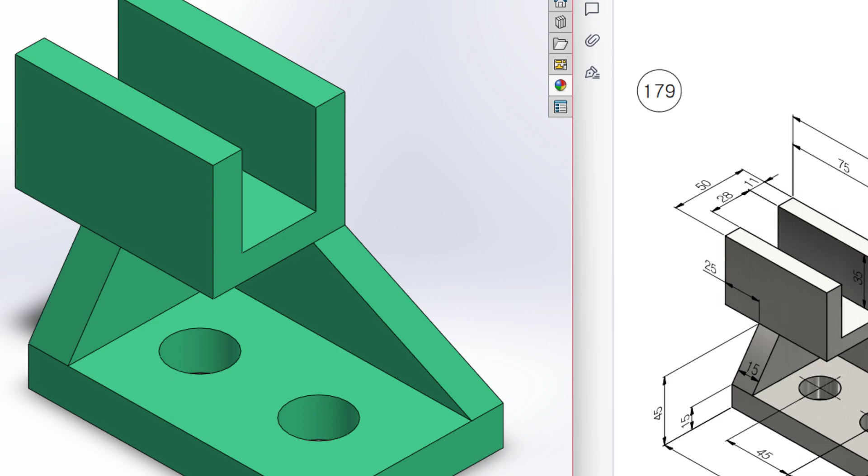Today we are going to solve this 3D problem. In this 3D problem, this is the isometric view and all the dimensions are given in the isometric view. We are going to start drawing from the top plane. In the top plane, we can see we have a rectangle, and this rectangle has a dimension of 110 by 70 unit. Then we can see it has an extrude boss of 15 unit.

In our rectangle, we have two extrude cut circles, one is here and another is here, and these two extrude cut circles have a diameter of 22, and this distance is 30 unit from here, and this distance is 30 unit here, and they are 45 unit apart. Okay, let's first draw that portion.

So let's go back to our sketch. So I'm selecting the top plane here. Now select sketch. Okay, now select the corner rectangle, draw a rectangle of 70 by 110 unit. Okay, so this rectangle has been done. Now isometric it for a better view.

Now go to features. Now extrude boss. Now extrude boss it to 15 unit. Okay, now press OK. Now this portion has been done. Now we'll draw the extrude circle. If you want, you can draw the extrude circle in the previous sketch, but I am drawing it separately. Now select this portion. Now sketch. Now normal to it. After that, select the circle from here and draw a circle

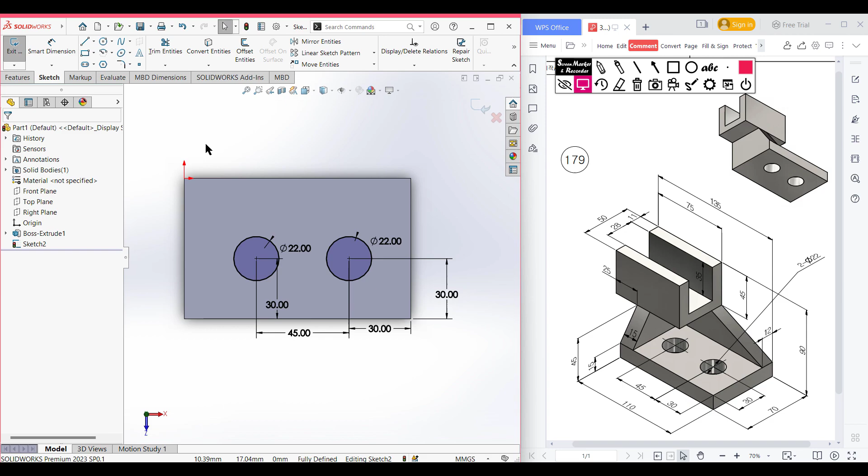Now go to features. Now extrude cut. Now extrude cut it to through all. Okay, now press OK. So this extrude cut circle has been done. Now let's go back to our sketch.

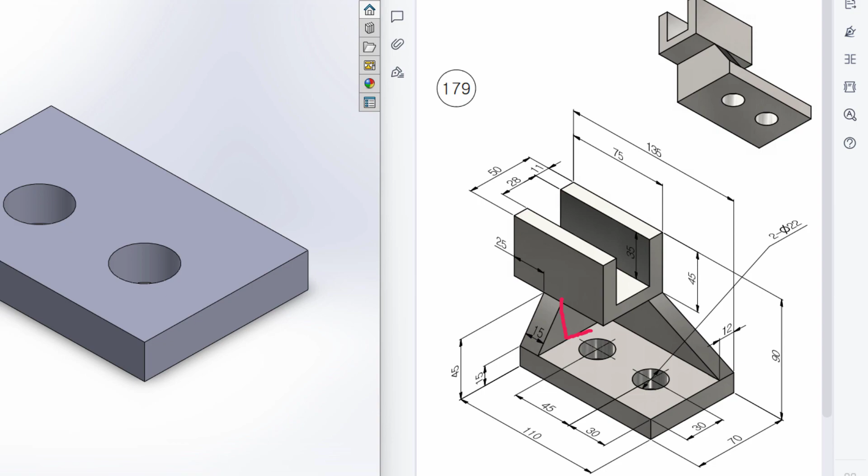In our sketch, we can see we have a trapezoidal shape like here, and for drawing this trapezoidal shape, first of all, if we look back to our sketch, we can see this portion is quite a rectangular shape. Okay, and for drawing this rectangular shape, we can see it has a distance of 50 unit. And the vertical distance is 45 minus 15 unit, and from that I will draw an inclined line like here, and then I will close the shape, then I will extrude boss it to 15 unit.

Okay, so in the same way, we can see we have another rectangular shape in here. And this rectangular shape has a distance of, as this extra distance is 25 unit, so this portion distance will be 75 minus 25 units, so it will be 50 unit. And then we can see this vertical distance will be the same as the previous, 45 minus 15 unit. Then I will draw an inclined line like here, and then I will close the shape, then I will extrude boss it to 12 unit. Okay, let's do that sketch first.

So I'm going to my sketch again, and now rotate your sketch and select this portion. Now sketch, now normal to it. After that, select the corner rectangle, and place the corner rectangle here, and now dimension it, as the height will be 45 minus 15 unit, and the length will be 50. Okay, now press OK. Now select the line tool and draw a right triangular shape like this one.

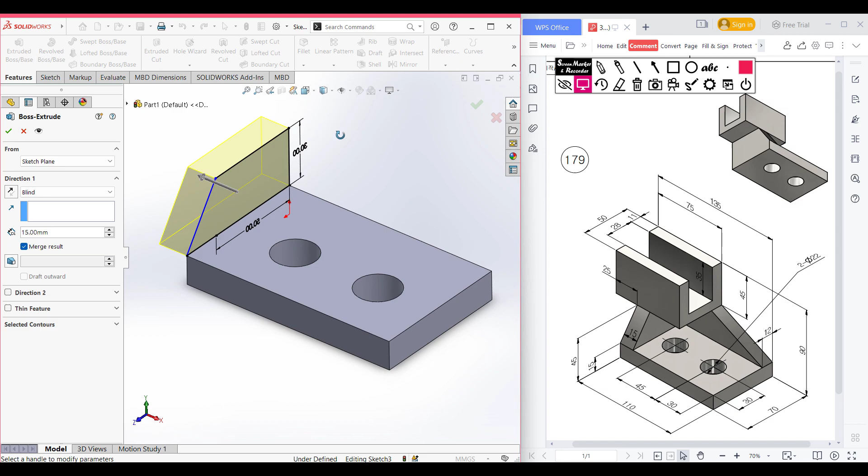Now go to features. Now extrude boss. Now extrude boss it to 15 unit. Okay, I'm extrude bossing it to 15 unit. Now reverse the direction. Now press OK. So this portion has been done.

Now rotate your sketch and select this side, and now sketch, now normal to it. After that, select the corner rectangle, and from here draw the corner rectangle from here to here. The height will be as usual the 30 unit, okay, and this portion will be 75 minus 25 unit, so it will be 50 unit.

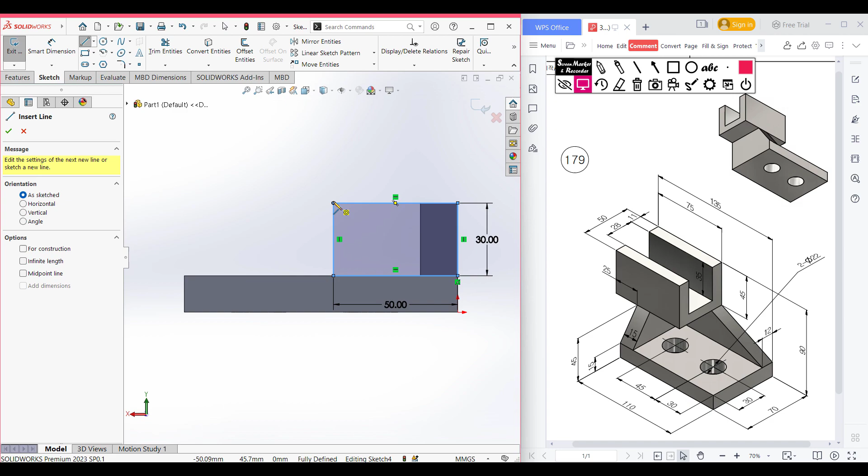Now select the line from here and draw an inclined line like this and draw a triangular shape like this one. Now press OK. Now select the trim option and trim this unnecessary line that we don't need. Now press OK. Now isometric it for a better view.

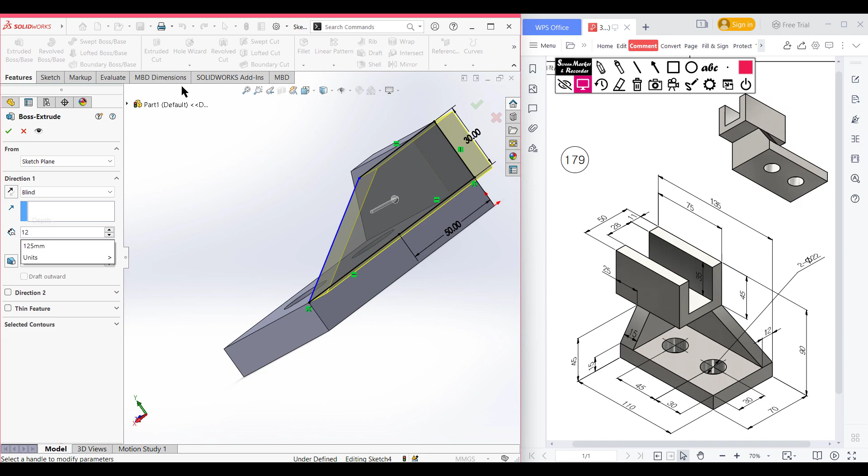Now go to features. Now extrude boss. Now extrude boss it to 12 unit. Okay, this portion has extrude boss of 12 unit. Now reverse the direction. Now press OK. So this lower portion has been done quite well.

Now let's go back to our sketch. Now it's time for drawing this upper portion. And for drawing this upper portion, first of all I'll draw this rectangular shape, and this portion has a dimension of 50 unit, and this portion has a dimension of 75 minus 25 unit, so it will be 50 unit as well.

Then I'll draw another rectangle like this one here, and this line has a dimension of 25 unit, and this vertical line has a dimension of 50 unit. Okay, then I'll extrude it to 45 unit.

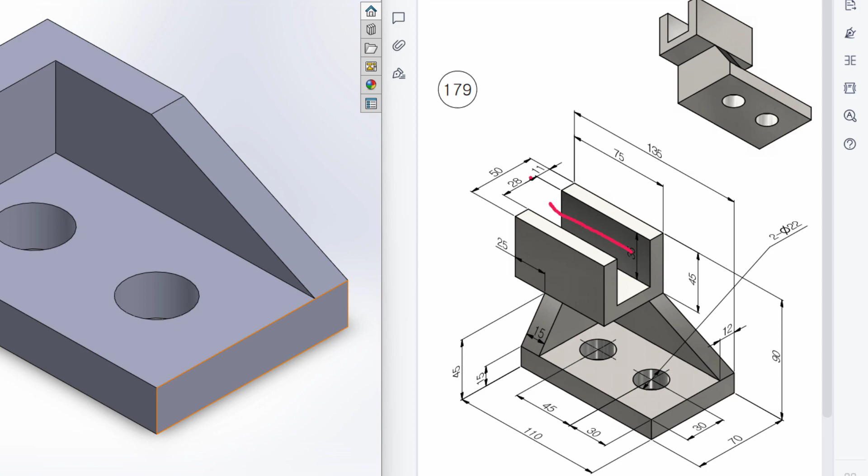After that, from that rectangular extrude boss, I'll draw a center line here, and from that center line I'll draw an offset of 28 unit. So this side will be 28 divided by 2, and the other side will be 28 divided by 2. Then I'll draw two offset lines, and after that I'll close the shape, and then I will extrude cut it to 35 unit.

Okay, let's go back to our sketch. Now selecting this upper face, now sketch, now normal to it. After that, as usual, select the corner rectangle and place the corner rectangle here and draw a rectangle of 50 by 75 minus 25 units, so it will be 50 unit as well. Okay, as it is a square shape, we do not need to over dimension it again.

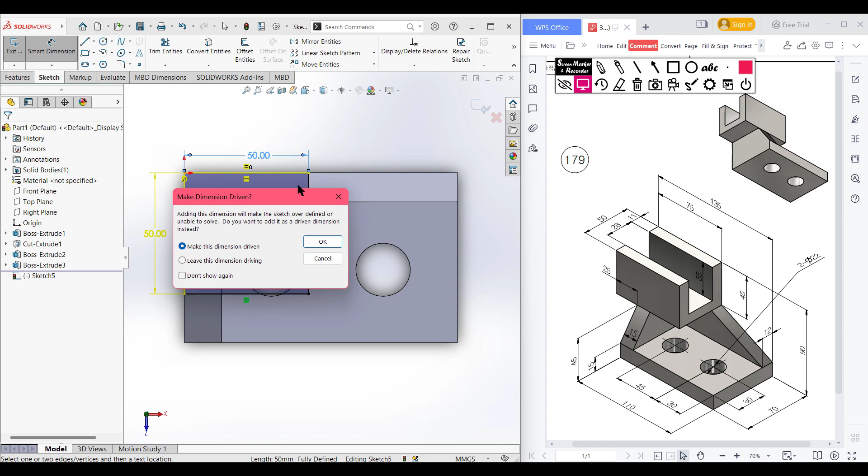Now select the corner rectangle again and place and draw it, and this has a dimension of 50 by 25 unit. Now press OK. Now we have a common line here, we need to trim this portion, so I'm selecting the trim option and trimming this middle line. Now press OK. Now isometric it for a better view.

Now go to features and now extrude boss. Now extrude boss it to 45 unit, so dimension it to 45 unit. Select this portion and this portion and this also. Now press OK. Now it's time for the rectangular extrude cut.

For drawing the rectangular extrude cut, I am selecting this upper face. Now select sketch, now normal to it. After that, select a center line and draw a center line of 75 unit, and after drawing this center line, select the offset entities and offset it to 28 divided by 2, so it will be 14 unit. Now select this line, now select bidirectional and cap ends.

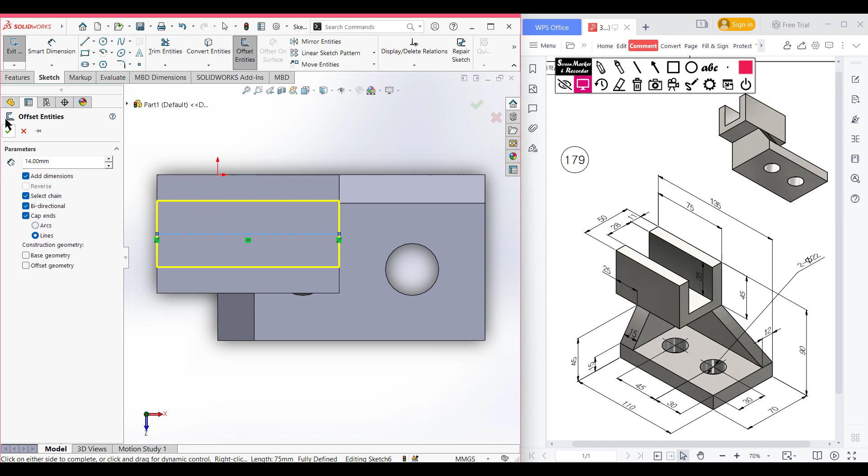Now press OK. Now isometric it for a better view. Now go to features, now extrude cut. Now extrude cut it to 35 unit, so I am selecting the blind option and dimension it to 35 unit. Now press OK. So as you can see, we have done our 3D sketch.